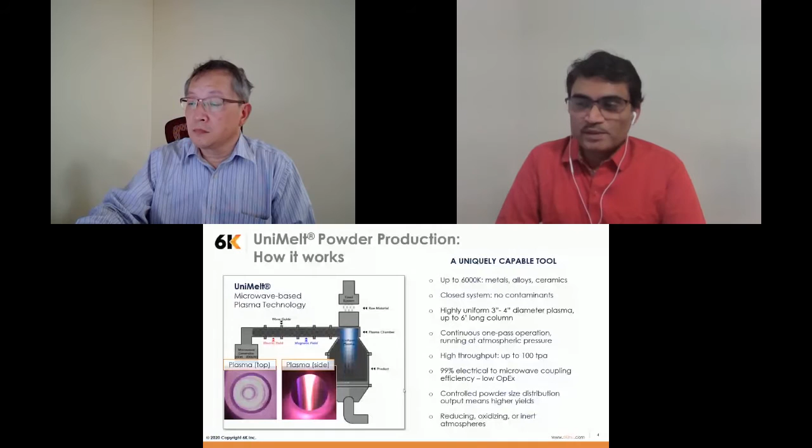Let's see what is UniMelt and how it works. So 6K UniMelt technology is based on microwave coupled plasma. So the basic difference between microwave plasma and other existing plasma technologies is the cross-section of plasma. In the microwave coupled plasma, we have almost uniform plasma in cross-section from center to end. So it is uniform temperature, and there is basically a maximum working area there.

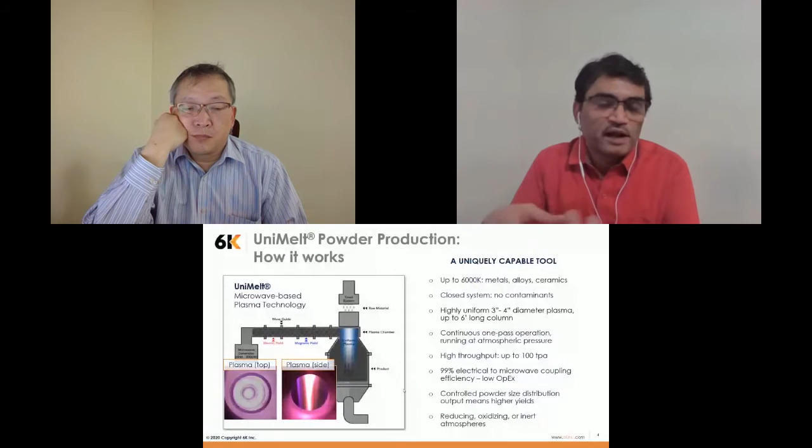So what happens there is that we can pass the material through plasma one time, and then it is processed. As against other plasma systems, they have discontinuous plasma. There is a cold spot in the center of plasma, and that means that not all the material experiences the same heat history.

So our plasma can use different types of atmospheres, like reducing atmosphere, oxidizing atmosphere, or neutral atmosphere. And with the help of that, we have the ability to spheroidize powders, and also we have the ability to synthesize different materials or different composite powders with our plasma system.

So this is a little bit about the company that we acquired in Pittsburgh. The company is complementary to our technology. This company actually recycles machine waste from various subtractive manufacturing techniques and turns it into highly engineered compacts. Basically, this company works with titanium, and it produces highly engineered titanium compacts for use in the aluminum smelting industry for titanium alloy additions.

And these aluminum alloys are used in various sectors like the automotive sector. So if you have a Ford F-150, then you have rolled aluminum sheets in there. It is used in defense and aerospace applications, and also in medical applications such as ventilators.

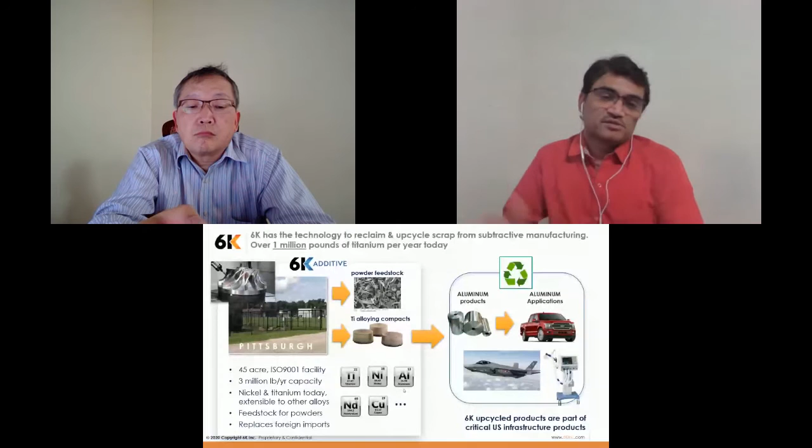So high entropy alloys are a different family of alloys, which are termed high entropy alloys. If you can see this little plot there, high entropy alloys are generally those which have entropy of mixing more than 1.6 R. And that corresponds to minimum 5 elements. On the x-axis, you can see number of elements in equiatomic compositions in the alloy, and on the y-axis there is entropy of mixing. So where there is an onset of the linear portion of that plot, that's termed as high entropy alloys.

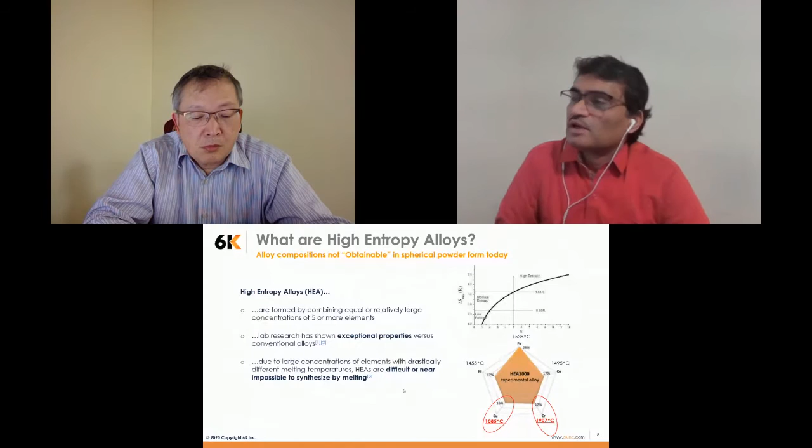So high entropy alloys basically give us a very large design space. If you see this ternary phase diagram, the conventional alloys are concentrated at the apexes of this ternary diagram. So this yellow section in this figure is where the conventional alloys are. The green portion is non-equiatomic high entropy alloys, and the red dot in the center is equiatomic high entropy alloys. So basically, high entropy alloys have very, very high design space, which is not utilized today, and that we can utilize for different types of alloys, which can give you various combinations of properties.

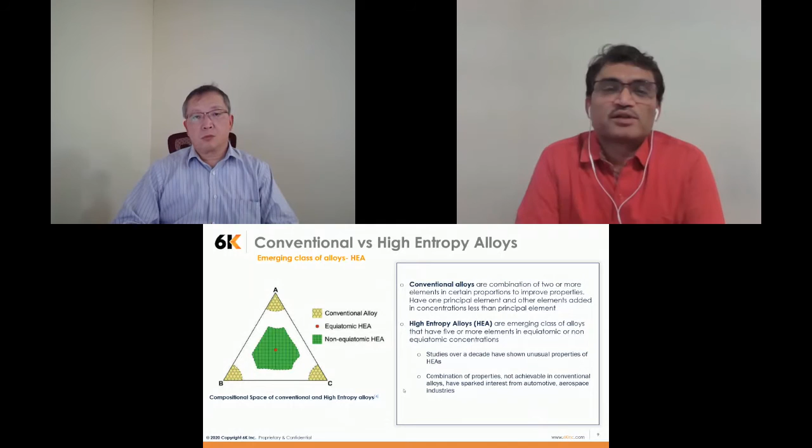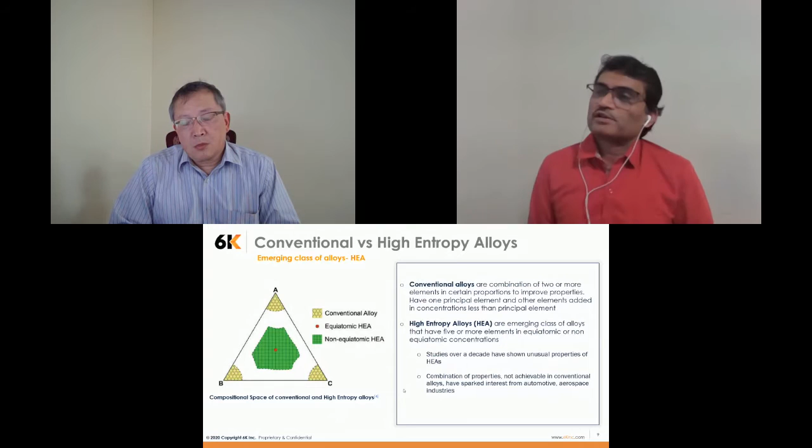So basically, the high interest in high entropy alloys is because in lab testing or lab research, it has shown that it can produce different types of properties which are not achievable in conventional alloys, and the combination of properties which is not available in conventional alloys. So this slide shows what kind of properties high entropy alloys can produce. This is a very congested slide, but what we are trying to show here is the importance of high entropy alloys.

So if you see the top left figure, it is a plot of yield strength and density. And there you can see that high entropy alloys are at the top right corner. So that means it is outperforming titanium alloys, or it is even close to bulk metallic glasses. Similarly, the lower left figure is showing the relationship between tensile strength and pitting potential, where high entropy alloys have high pitting potential and higher tensile strength than nickel-based superalloys. This particularly applies to the oil and gas industry or undersea applications.

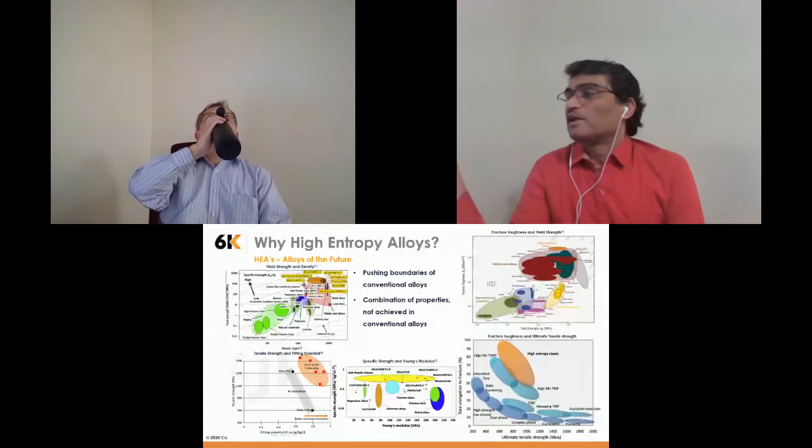And similarly, the other plots are showing a relationship between specific strength and Young's modulus. And on the right side, the two figures are showing the relationship between fracture toughness and strength of high entropy alloys.

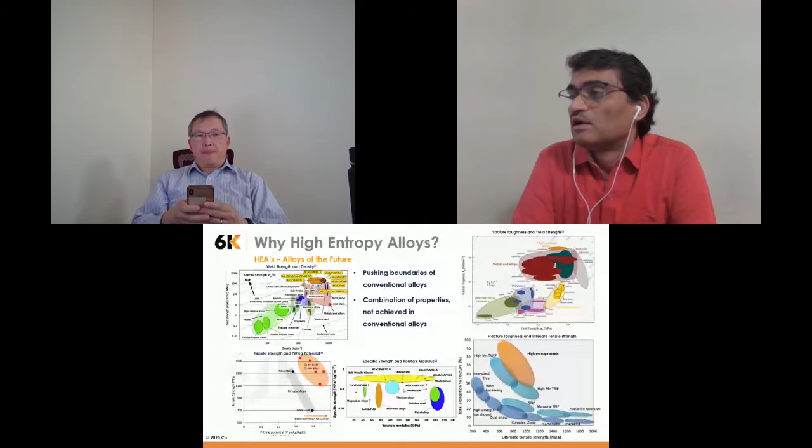So even if these high entropy alloys have interesting properties, why are they not in mainstream production or application? One of the things is basically conventional alloys are manufactured using melt-based technologies, either by induction melting or arc melting. What happens in high entropy alloys, since the elements are in equiatomic concentrations, sometimes they exceed the solubility limits of each other, and that becomes difficult to produce by melt-based technologies.

Sometimes the high entropy alloys have elements that have a drastic melting temperature difference. Like in our example, it's chromium and copper. They have a very drastic melting temperature difference, but they are present in equal amounts. So such alloys are either difficult, impossible or expensive to make with melt-based technologies.

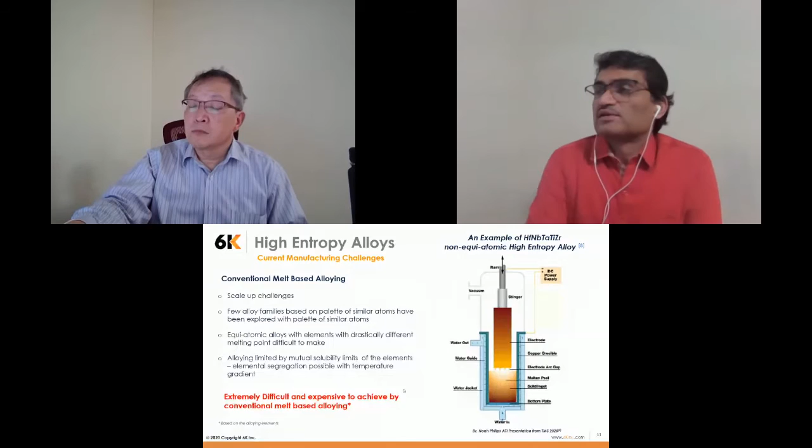And for powder production especially, currently powders are produced by either gas atomizing or plasma atomizing. Both are melt-based technologies. The input for gas atomizing is ingot, which is produced by melting, and the input for plasma atomizing is wire, which is also made by melting. So for alloys which are difficult or expensive to manufacture by melting, we cannot use gas atomizing or plasma atomizing. Otherwise, it will be more expensive.

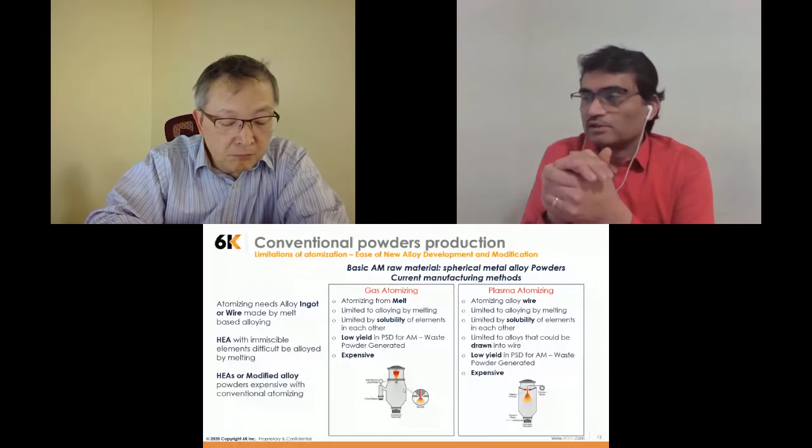And that makes these processes expensive. So for HEAs, which are in development stage, or even for existing alloys which people want to modify for printability, atomizing is the most expensive method for trials.

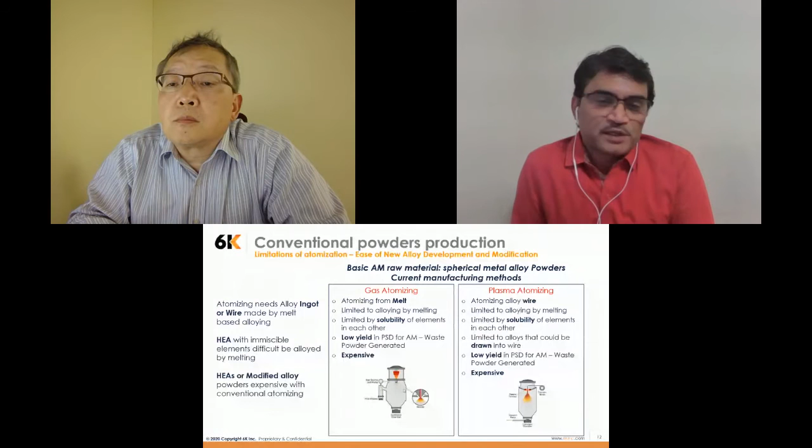So what we are bringing into the picture is mechanical alloying. Mechanical alloying is a process that was initially developed for oxide dispersion strengthened alloys, ODS alloys, where the alloys are mixed with very fine or nano-size oxides, producing composite ODS alloys. This is basically a solid-state alloy, which means there are endless compositions that we can manufacture by mechanical alloying. It depends on the mechanical or kinetic energy of particles bombarding each other; they're mechanically forced to form the alloys.

But the main drawback of this process is the powder produced is very flaky and highly irregular. Ultimately it has very low density, which is not usable for additive manufacturing or hot isostatic pressing, the industrial processes for powders. So when you produce mechanically alloyed powder, it can be used in spark plasma sintering, and that's what people are using for research. Spark plasma sintering is not an industrial process, and this powder cannot be used for other industrial processes like MIM, tape, or additive manufacturing.

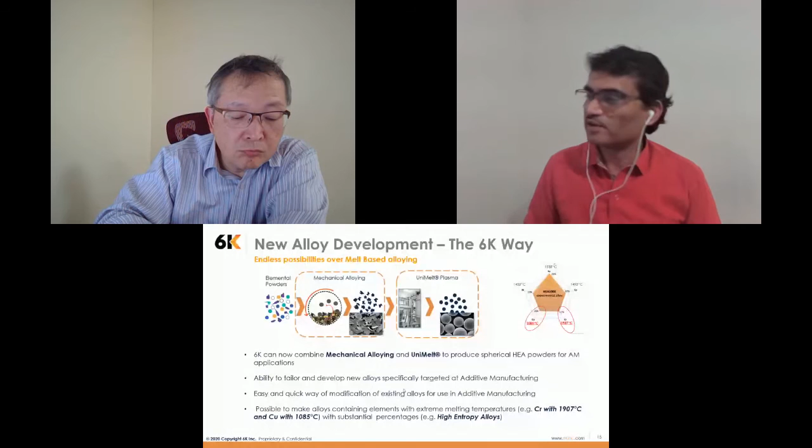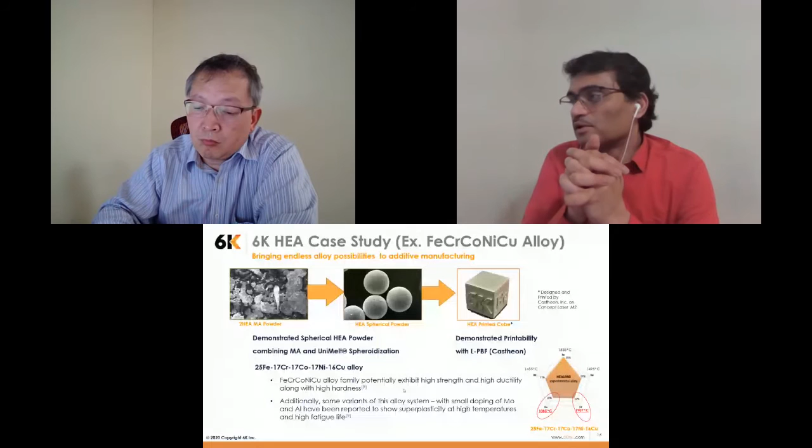So for demonstration, we have taken an alloy with components that have drastic melting point differences, like chromium and copper. In this case study, we manufactured this targeted alloy: 25% iron, 17% chromium, 17% cobalt, 17% nickel, and 16% copper. This is near equiatomic composition. We successfully manufactured it by mechanical alloying, then successfully spheroidized it. After spheroidizing, we also printed it with the help of Castheon. Castheon designed and printed this cube that shows 6K and the 5 elements on the other 5 sides.

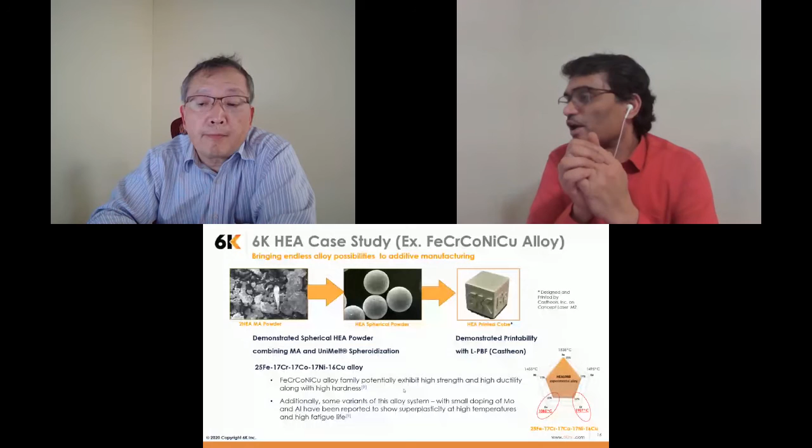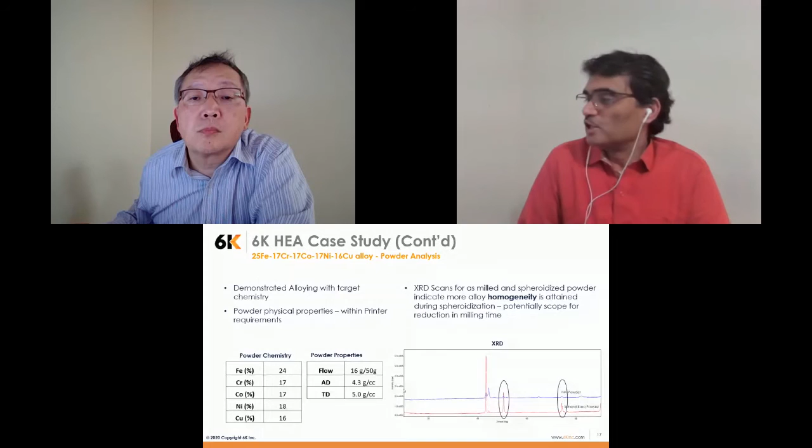In this XRD plot, the blue line is the mechanically alloyed powder used as feedstock for UniMelt spheroidizing, and the red plot is for the spheroidized powder. You can see in these 2 markings that on the blue line there are very weak peaks that are very prominent after spheroidizing. That shows different phases forming by reducing the elemental peaks; you are forming an alloy, and these peaks are representative of that alloy.

We are still investigating this with further techniques like TEM and SEM, but based on XRD, we can say that we can homogenize this alloy during spheroidization, which means we can reduce the milling time. With this, I'll hand it over to Dr. Gao for his experience with printing this powder.

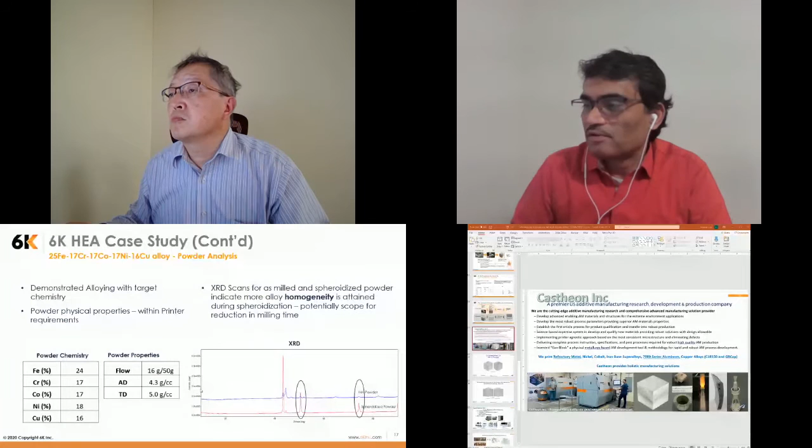All right, Sunil, thank you so much, and good job. I got 2 minutes to go over charts and show Castheon.

Castheon is founded for the sole purpose of advanced additive manufacturing, doing in-depth additive manufacturing study from grain morphology control to process robustness and defect elimination. We do a lot of high temperature material. My background is in the rocketry industry, so we do refractories, nickel, cobalt, and iron-based superalloys. We also do 7 series aluminum and coppers, GRCop copper for rocket combustion. Let me see, next chart.

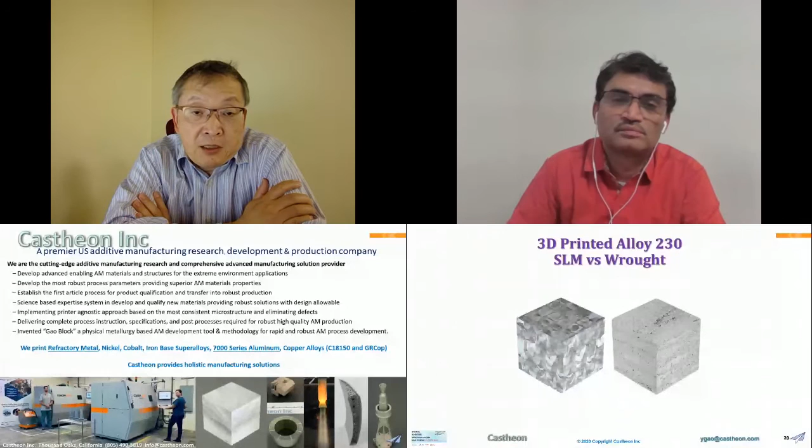All right, next one. So we're really focusing on how to optimize the grain structures of additive manufacturing. On the chart, on the left is the additively made material, on the right is a forged material. And what you can see is the additive looks awful; this is an as-welded microstructure, and depending on how you etch them, you're going to see a different grain size. The grain size is typically pretty large, about ASTM grain size 4 or 5.

But if you heat treat them, this is after heat treat, we were able to convert this 100%. Not all additive alloys can be converted 100%. There's a certain copper alloy that never converts, a certain aluminum alloy that never converts, and certain solid solution strengthened materials are very difficult to convert. So for most applications, we're converting them to have isotropic material properties. And on the additive side, it's actually more homogenized than the raw material.

The other thing we explore is the strengthening mechanism. This is the Haynes alloy, Haynes 230. On the left is additively made. The Haynes alloy has 14% tungsten and high carbon. So this material is strengthened, in addition to solid solution strengthening, by stable carbides. In the raw form, the carbides are already formed. In the additive form, the carbon and the tungsten truly stay in solid solution.

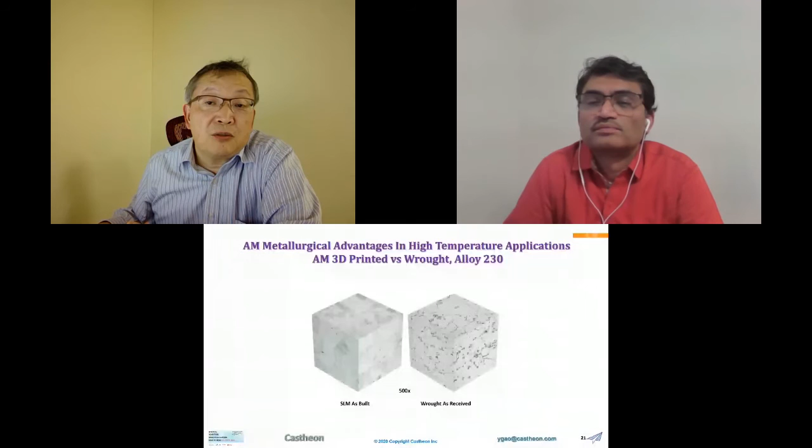So next, if you heat treat them, you can see uniform precipitation of the carbide. On the other hand, you have these large carbides already formed during the traditional mill process, the casting process. So you have to do an extensive thermomechanical reduction to get rid of those, because they cause the grain boundaries to be laced up and cause sensitization of the material. So you basically lose the high temperature strength and you lose corrosion resistance.

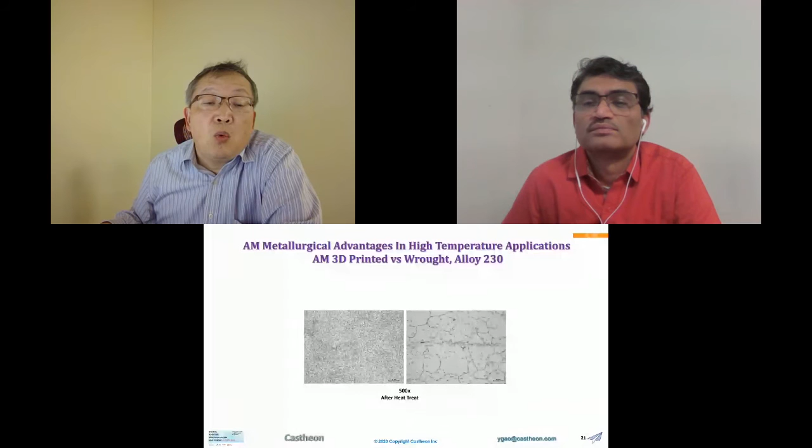The other thing we emphasize is that we are a machine agnostic developer. Everything we develop, we're able to transfer over to different machines, and most times we obtain in-family material properties. We developed on our Concept Laser machines or on the Renishaw machines, and transferred over to the EOS machines, the Matsuura machines and the SLM Solutions machines. There was no problem; we retained the material properties. Our development process is machine agnostic, whether it's 2D optics or 3D optics, we take care of that all.

And so we have this development protocol. It's based on a physical metallurgical process. We developed this, it's called a Gao Block, and we have the model. The model has been shared through the NASA system, through universities, and a lot of people are using it. Initially it was for quick parameter development, and later on it became process monitoring hardware. You can easily analyze this piece and it gives you a trace of how the material behaves. And so we print a lot of different things with this.

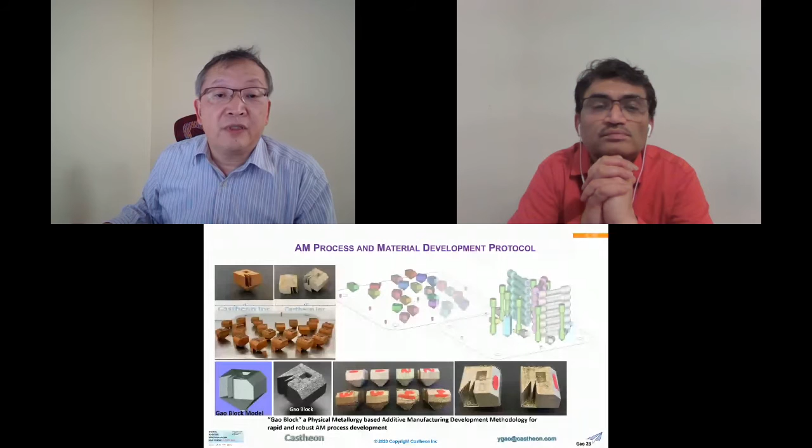Now going back to the high temperature applications. Previously I mentioned that on Haynes 230, we were able to get a far stronger and far higher temperature capable Haynes 230, just because we control the carbon and the tungsten and retain them in solid solution. In the metal world, it's all how you play with the solid solution. And once you can make solid solution in the net shape, you're the king.

And this is another example, the niobium C103. A couple of years ago, we developed this niobium C103, which is a refractory material. And what we found was, the two pictures above on the metallography are the grain structures of the 3D printed material. In the middle is the as-printed microstructure.

And on the right, this material has been exposed to 2,900 degrees Fahrenheit for 2 hours. So what we're seeing is this is an extremely stable material. So if you look at the background, the raw material, the microstructure, I don't know if you can see my mouse moving, and maybe I can click it here. Yeah, I can click here. Use the laser pointer. So you can see the raw material grain sizes are finer, but the thing is at 2,900 degrees, grain start to expand. So explosive grain growth and grain boundary sliding, you lost the

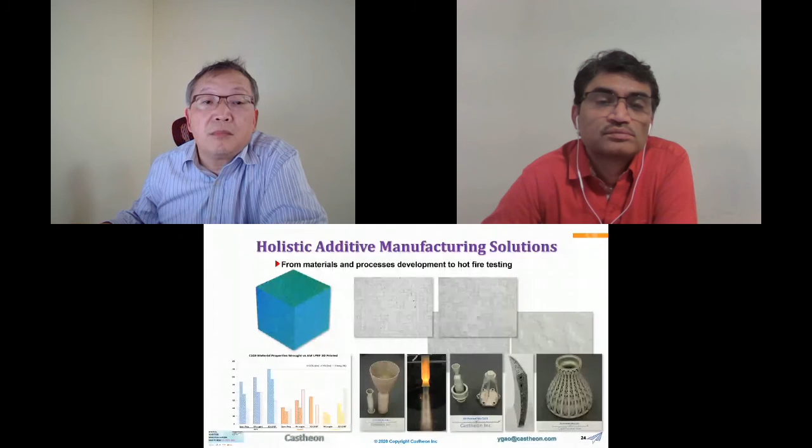And I think the great thing about the 6K process is, typically if you're researchers, you can buy all the elemental forms in the form of powder. So the high entropy alloy gave you a great chance of mixing all different powders together, and using 6K's process, you can create desirable chemistries, and you can quickly test them using additive. In the other process, if you have to cast them, you have to make all the adjustments, it's going to be a headache, but this one is far more efficient to explore the material, especially in the multi-component high entropy alloy arena. So next is, let me see, how do I go to the next one? Some references, we appreciate everybody working on this, and we'll leave some time for the questions, Q&As.